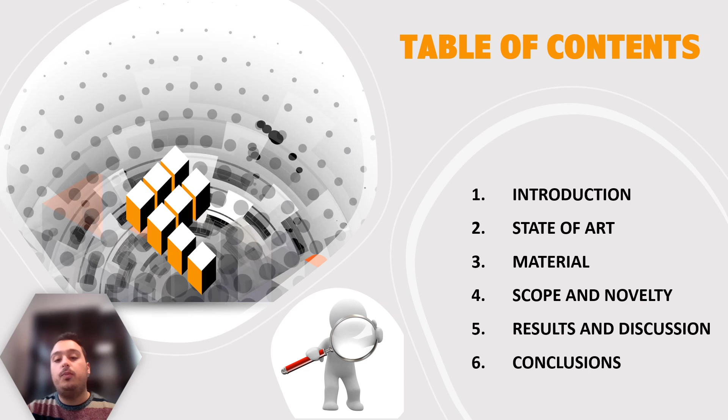Hello everyone, I'm Giuseppe Lovisi and I will illustrate the main results obtained in collaboration with Professor Luciano, Rosa Penna and Arturo Pascuzzo in the work entitled A Stress-Driven Model Incorporating Surface Energy Effects for the Bending Analysis of Function-Graded Nanobeams with Discontinuities. The presentation will follow these points: introduction, state of art, materials, scope and novelty, results and discussion, and finally conclusions.

In recent decades, there have been hundreds of applications of nanomaterials in various sectors, especially in the field of NEMS. Nanotechnology is science, engineering, and technology at the nanoscale, indicating the set of techniques and methods aimed at creating a system in which at least one dimension is of the order of nanometers.

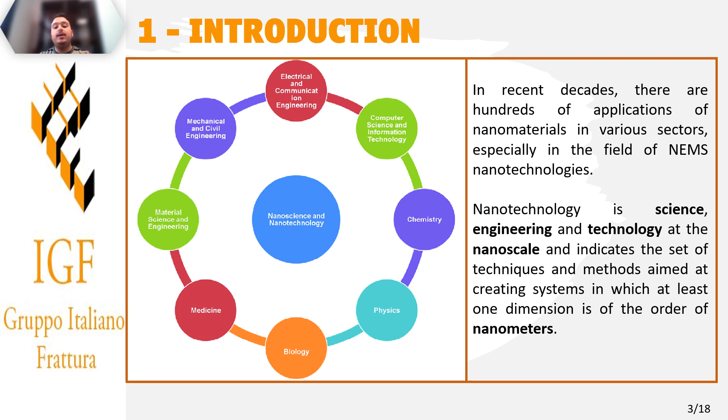As is well known, for the study of the static and dynamic response of nanobeams, it is necessary to use a non-local elasticity model. Hence, the classical Cauchy local continuum model, in which the stress at a point depends only on the strain at that point, cannot be used.

In 2017, Romano and Barretta introduced the integral stress-driven model, which appeared well-posed from a mathematical point of view and provides a coherent approach for the study of nanostructures. The integral form is equivalent to the differential form if and only if the two pairs of constitutive boundary conditions are satisfied at the nanobeam ends.

The term Lc indicates the characteristic length and is a function of the non-local parameter, which allows you to capture small-scale effects, while M and chi indicate the bending moment and bending curvature respectively.

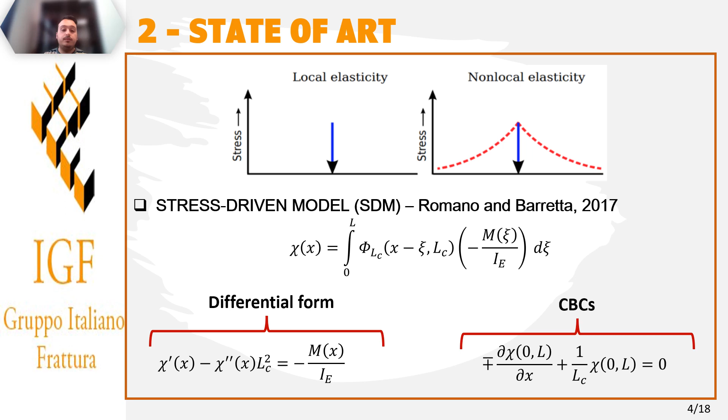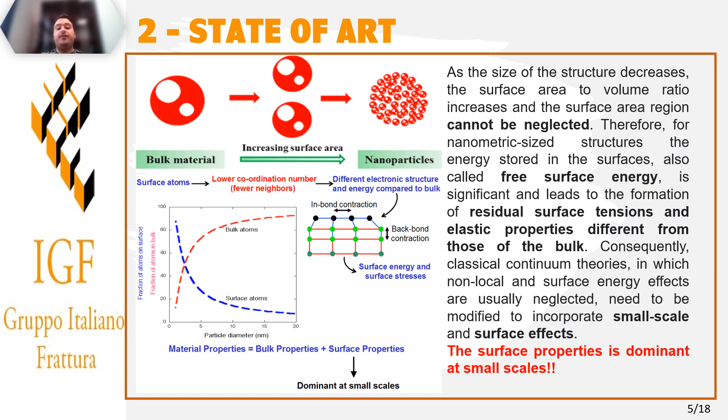As the size of a structure decreases, the surface area to volume ratio increases, and the surface region cannot be neglected. For nanometric-sized structures, the energy stored in the surface, also called free surface energy, is significant and leads to the formation of residual surface tensions and elastic properties different from those of the bulk. Consequently, classical continuum theories, in which non-local and surface energy effects are usually neglected, need to be modified to incorporate small-scale and surface effects. The surface property is dominant at the small scale.

One of the first mathematical theories incorporating surface stress was proposed by Gurtin and Murdoch. The surface of the nanobeam is modeled as a zero-thickness membrane perfectly bonded to the underlying material, with no slipping between the surface and the bulk material admitted. Moreover, bulk continuum and surface layer are characterized by different stress states.

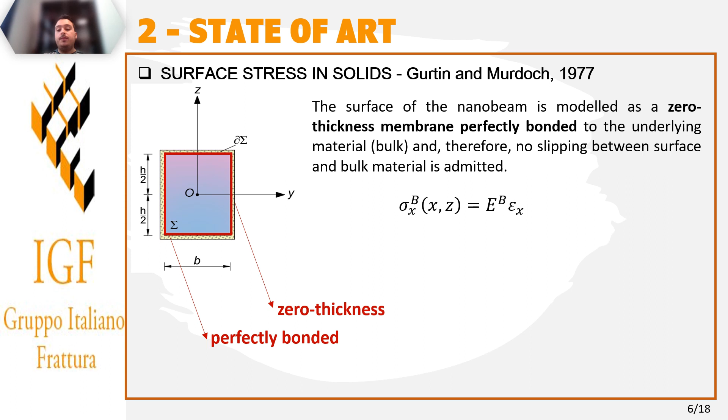A uniaxial stress state is assumed for the bulk, but unlike classical Bernoulli-Euler beam theory, the component of the bulk stress in the transverse direction, which describes the surface layer and bulk interaction, is not negligible due to surface effects, and is assumed to vary cubically along the FG nanobeam thickness according to the following equation.

For the surface layer, the relevant constitutive relation is formulated as follows, where Es is the Young's modulus for the surface layer, and tau S is the residual surface stress.

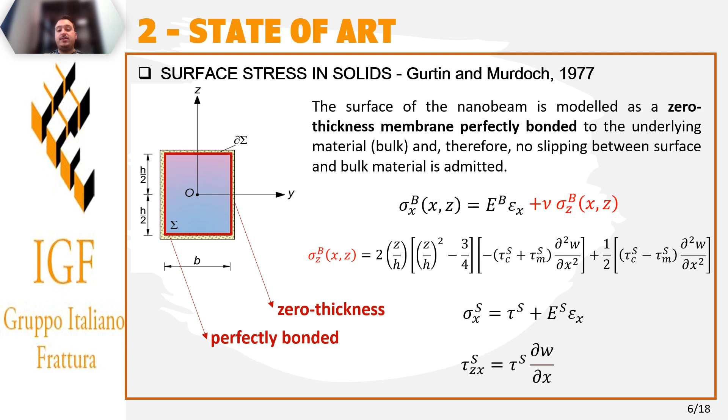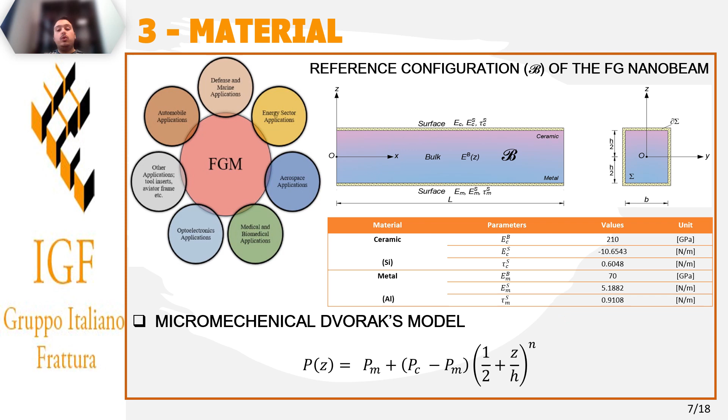In this work, ceramic and metal are coupled. The aim of this work was to couple the stress-driven non-local model with the theory of Gurtin and Murdoch for a function-graded material in the presence of a crack or load discontinuity.

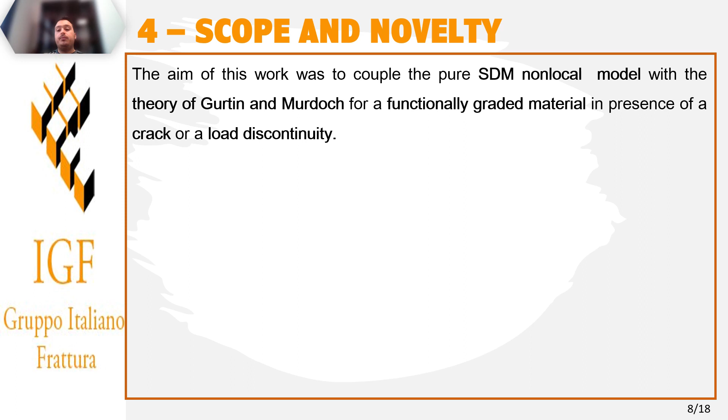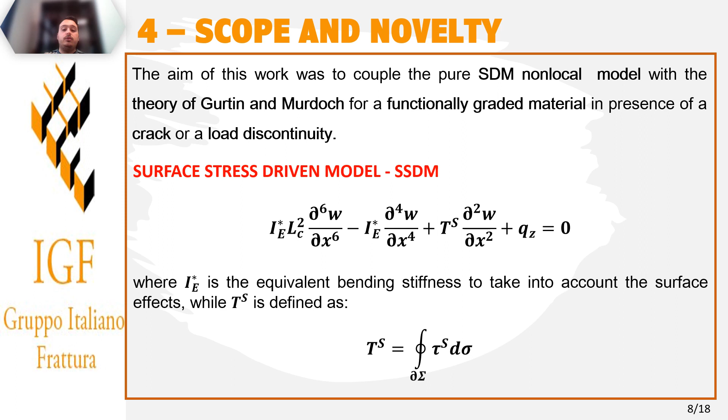Combining the above theories, the governing equation incorporating the effect of surface energy in terms of transverse displacement of each part of an inflected FG nanobeam can be formulated as follows, where IE* is the equivalent bending stiffness accounting for the surface effects, while Ts is defined as follows.

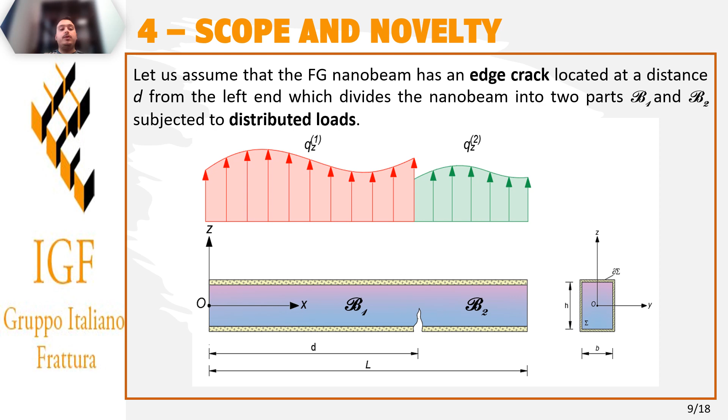Let us assume that the FG nanobeam has an edge crack located at a distance d from the left end, which divides the nanobeam into two parts, B1 and B2, subject to distributed loads.

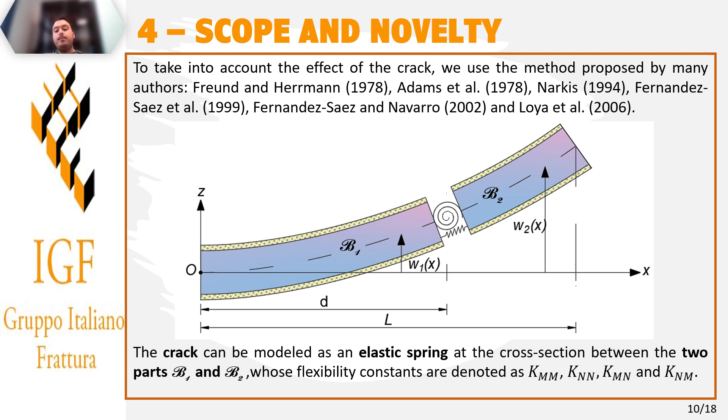To take into account the effect of the crack, we use the method proposed by many authors. The crack can be modeled as an elastic spring at the cross-section between the two parts B1 and B2, whose flexibility constants are denoted as Kmm, Knn, Kmn, and Knm.

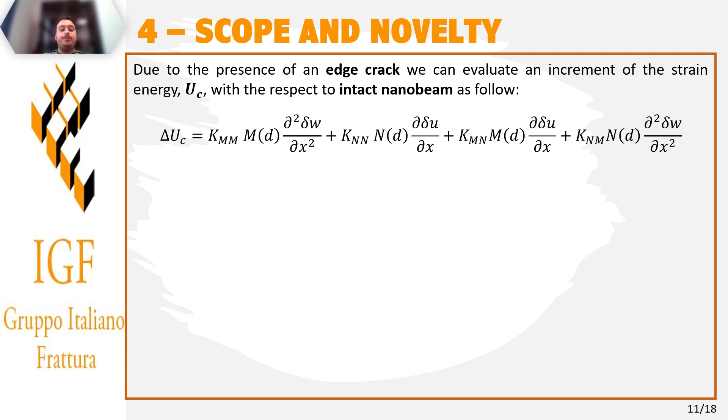Due to the presence of an edge crack, we can evaluate an increment of the strain energy with respect to the intact nanobeam. In this work, the crossover flexibility constants Kmn and Knm are assumed to be zero. Moreover, no longitudinal displacement is considered. Only the bending problem is investigated, and hence the increment of the strain energy related to Kmm can be expressed by the following relation. Consequently, the following relative boundary conditions at the crack position must be considered, where K indicates the crack severity.

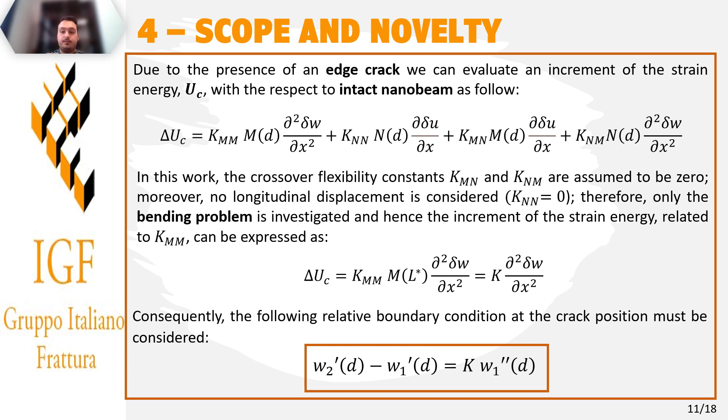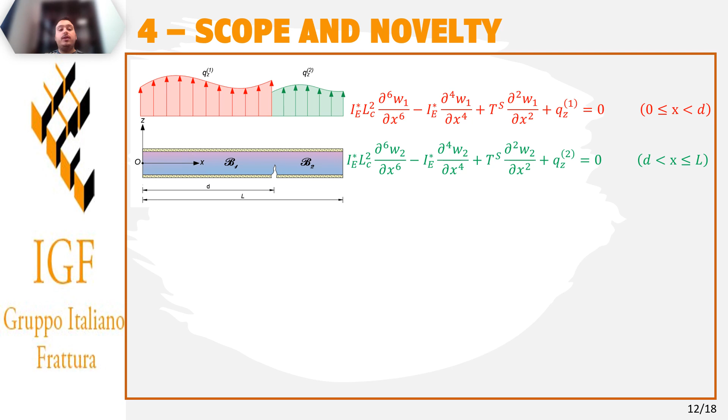Thus, we have two equations for each part of the nanobeam: the equation in red for the left of the discontinuity, and the equation in green for the right of the discontinuity. These two equations, which present 12 unknown constants, must be solved with the specified boundary conditions.

There are 4 standard boundary conditions, 4 compatibility boundary conditions at the discontinuity, 2 constitutive boundary conditions, and 2 constitutive continuity boundary conditions.

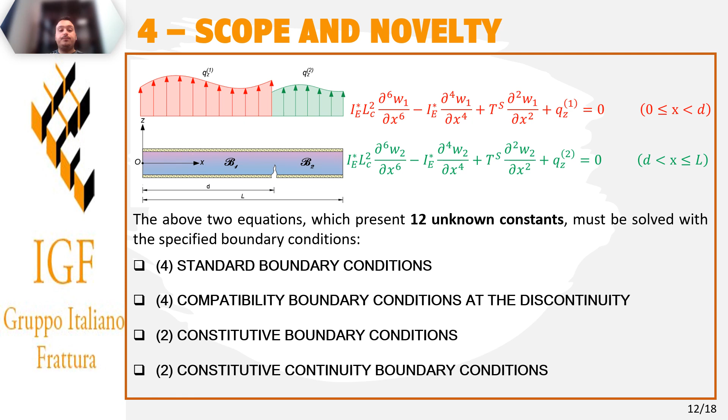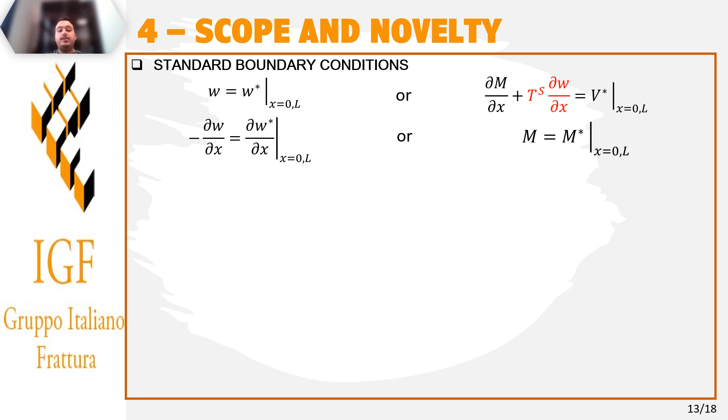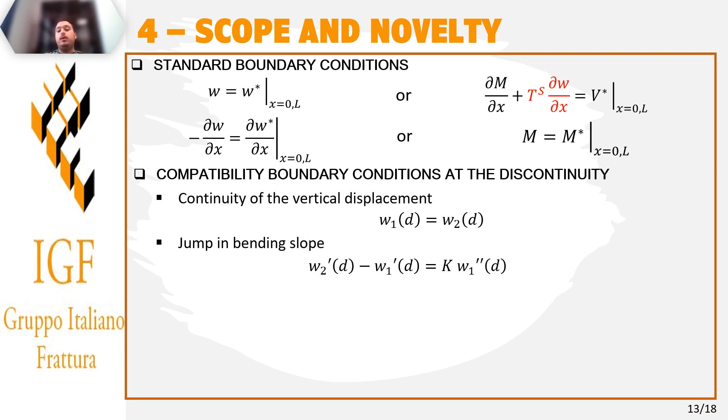So we have 4 standard boundary conditions, and in red are highlighted the terms which take into account the surface effects. We have 4 compatibility boundary conditions at the discontinuity: continuity of the vertical displacement, jump in bending slope (in which we take into account the crack severity), continuity of the bending moment, and continuity of the shear force.

The constitutive boundary conditions were introduced by Romano and Barretta in 2017. In particular, the constitutive continuity boundary condition introduced by Caporale et al. in 2020 is here modified to take into account the surface effects.

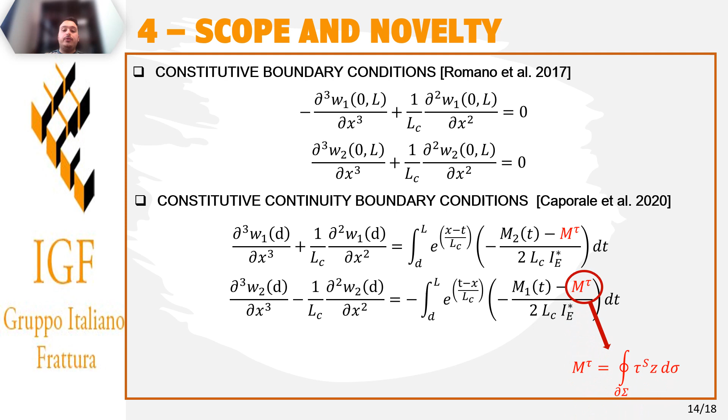For reasons of timing, I will now show you only the main results obtained for a clamped-pinned functionally graded nanobeam in the presence of a discontinuously distributed load and crack severity.

In this slide, we show the dimensionless deflection for different values of crack severity for both the stress-driven model with and without surface effects. As is easy to see, the stress-driven model that takes into account surface effects always gives lower values than the stress-driven model without surface effects. By comparing the two figures, as the nonlocal parameter increases, both models provide a stiffening response. Also, as the crack severity increases, the deflection increases.

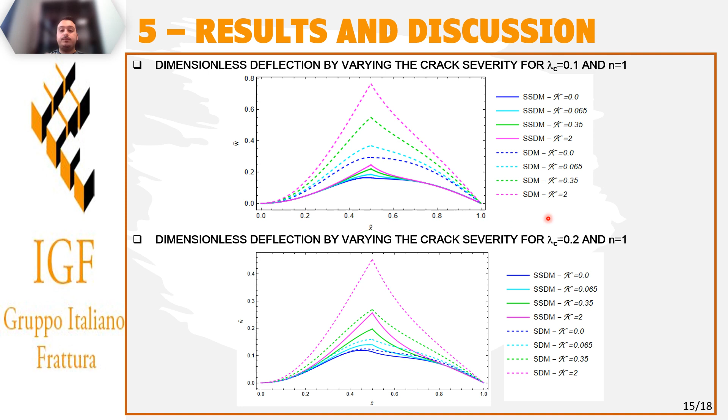In this slide, we show the results in terms of dimensionless deflection for both models and for different functionally graded materials. In this case, the nonlocal parameter was set equal to 0.2 and the crack severity equal to 0.065. In particular, as can be seen, the dimensionless deflection always increases as the gradient index of the material increases.

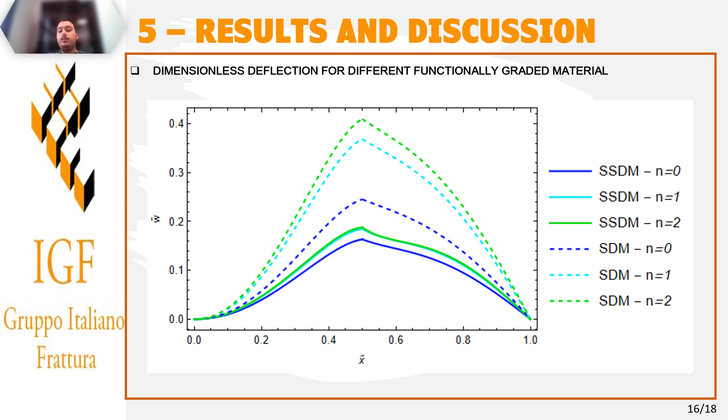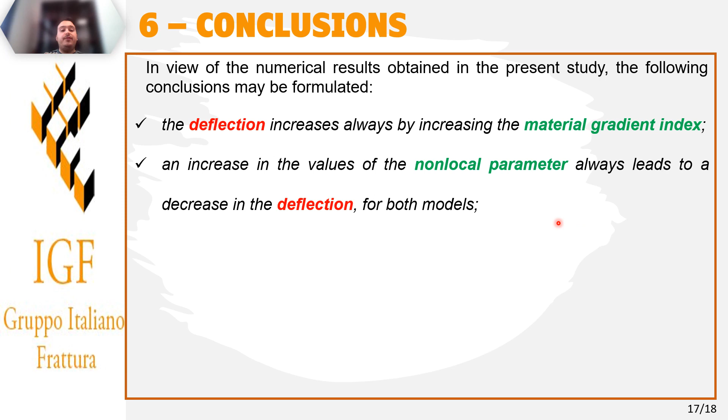In view of the numerical results obtained in the present study, the following conclusions may be formulated. The deflection always increases by increasing the material gradient index. An increase in the value of the nonlocal parameter always leads to a decrease in the deflection for both models. The deflection always increases as the crack severity increases.

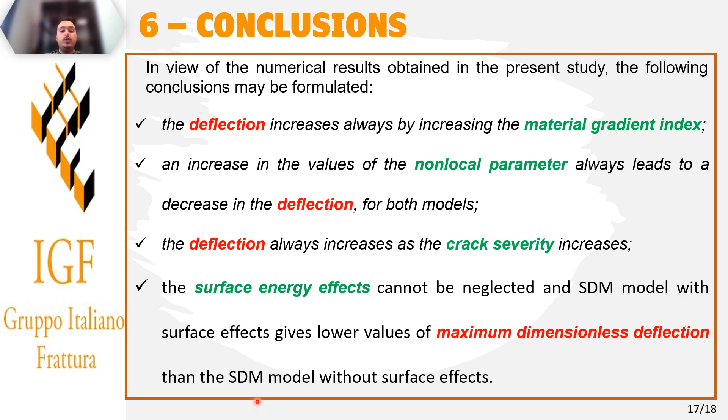Finally, the surface energy effects cannot be neglected, and the stress-driven model with surface effects gives lower values of maximum dimensionless deflection than the stress-driven model without surface effects.